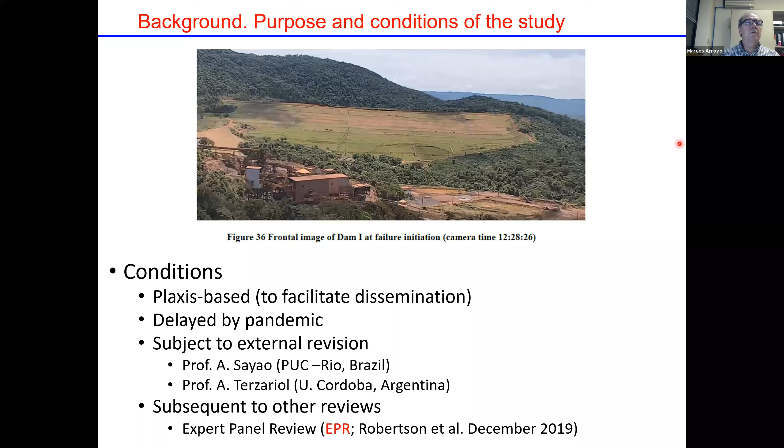I have to mention that shortly after we started, there was another review of this exact same problem that had come to light. That was the expert panel review led by Dr. Robertson, which was released in December 2019. That was of great help to us, because there was an enormous amount of work that was already done in that report.

But it is true that the report concluded there was one particular reason for the failure, which is a combination of strains due to creep and rainfall, that we quickly disagreed with. So, even if we disagreed with that conclusion, the report was useful, and that conclusion being there was also influential for the work we had to do.

I will first try to give you some background about the dam and its conditions, then I will have a section on material characterization of the tailings, and then I will briefly describe the simulations. There is also the report, as I said, that you can download. As I understand, the weather in Calgary is not ideal for outdoor activities right now, so if you're very curious, you can spend part of your winter nights reading the report.

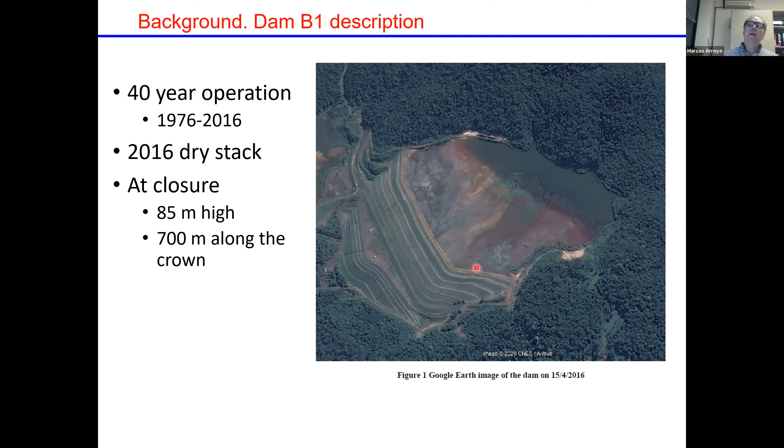If you look at the profile of one section, more or less you work out that the average slope is almost 1 to 3, and it had been even steeper initially. Then at some time, I think mid-90s, they decided to pull it back, and the continuation, the subsequent stages, had a lower slope.

One important thing about this dam is that the older stages had very, very poor drainage. So practically there was no efficient drainage in this area below the setback, because of either how it was conceived or how it was built, or problems with sinter feed as a material for drains.

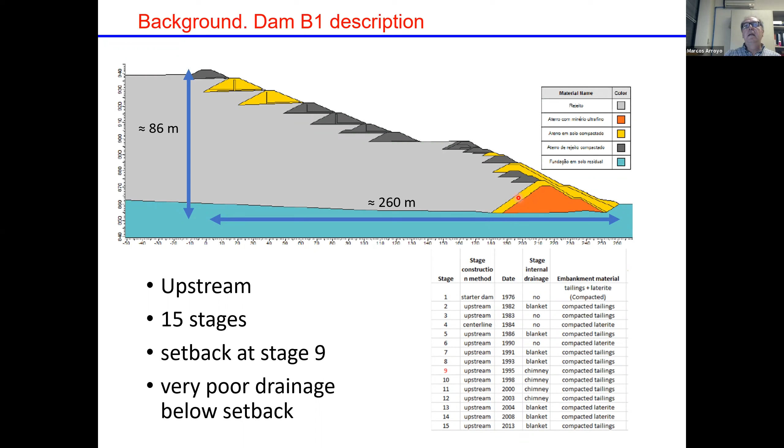After 2006, a spray bar method was introduced, but at that time the dam was already almost finished, 80 meters high.

That is a closer view of the timeline of how the dam was raised up. I have to say that Vale, which was the owner when the failure happened, took over this dam about 2001, this dam and the whole mine. And at that time, the dam was already a pretty steep one and a pretty tall one.

I have also marked here the timings of the CPT campaigns. Why? Because probably, without CPT, no one would have realized that the material in the dam was potentially liquefiable. The first campaign, in 2005, was relatively limited in scope, but already gave some indications on that respect. I don't know if it is related, but the rise sort of stops.

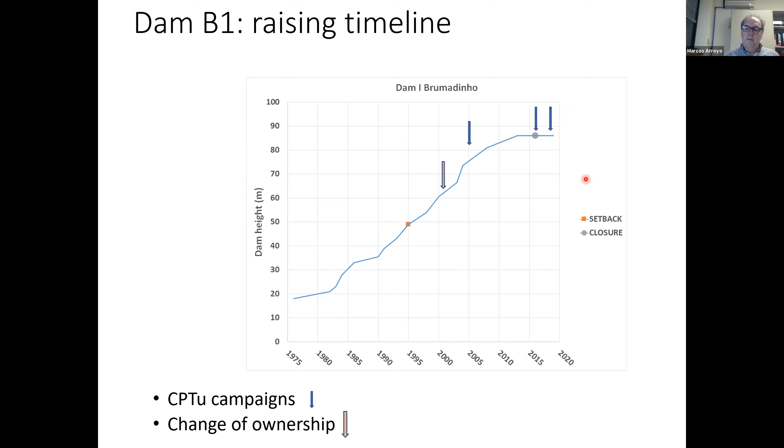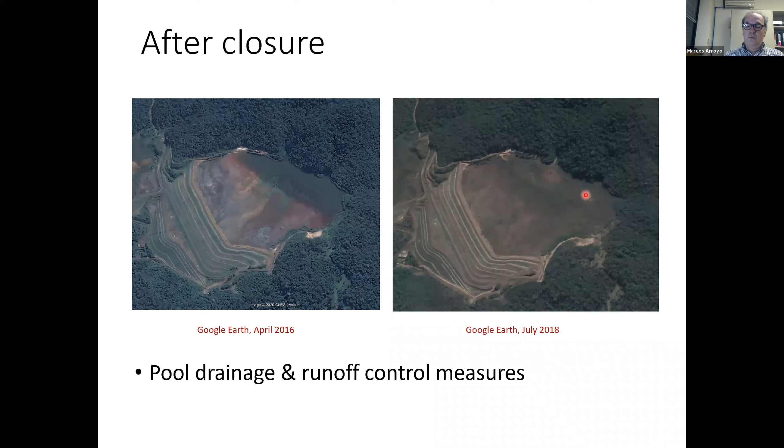After the dam was closed in 2016, the activities that took place were essentially directed to draining the pool and improving the runoff control measures on the side of the dam. They were seemingly achieving their purpose, because, as you will see, there were many piezometers.

There was a significant amount of instrumentation on dam B1. I think the total number is close to 100, but it's true that many of those 100 piezometers that had been historically placed were not all working. And of those that were working, some had erratic readings, etc. But still, there are around 25 piezometers that have a consistent history of readings between closure and failure.

When you look at what that story tells you, the water control operations that were taking place were seemingly effective, particularly above the setback, and not so much below the setback. But the situation was one in which water levels inside the dam were slowly reducing, which is one of the things that, when this explanation came out, made us perplexed, because we were aware of that already.

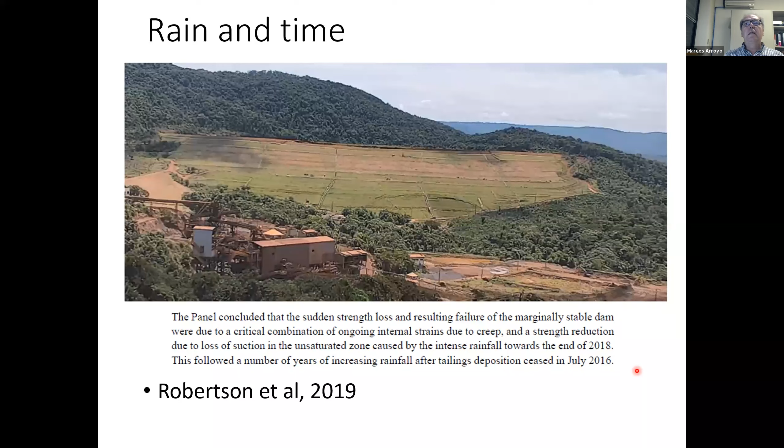Then this thing, how come? And there was this particular statement here: this followed a number of years of increasing rainfall after closure. Actually, we didn't find that. There were several gauges measuring rainfall close to the dam.

There was one actually at the offices of the dam, or very nearby, and this is the one we are using because it had records going back to 1975. It's true that the resolution of this gauge was smaller than the daily and hourly resolution of the other gauges, but those had a shorter time history. If you look at this record from 1975, when the dam was started, what you see is that the two years after closure were among the driest on the record.

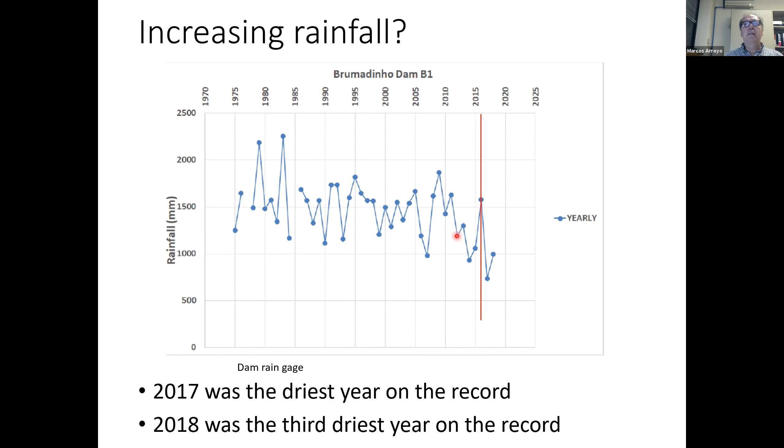The point is that everybody agreed that those results were suboptimal and that something should be done to improve the condition of the dam. Now the question was what? There was also an intention midterm to remine the dam, for reasons that will become clear in a minute. And a very highly qualified review panel endorsed measures six months before failure to improve drainage and to perform more site investigation and locate more instrumentation, because everybody was aware that any remining operation was going to be tricky.

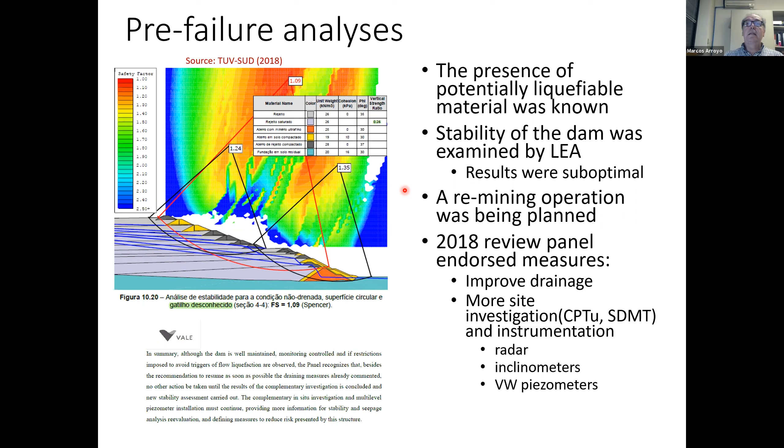So this is what was attempted in the last year. And of these ideas of improving drainage, the first idea was to try to perforate frontal drains at the setback, in the lower area of the dam - deep horizontal drains up to 100 meters long that were meant to be perforated, as we know, in liquefiable silts.

This is liquefiable silts which in a larger part were full of water. This is a very difficult task to perform, and the installation of those drains was not successful. There were 30 planned, and only 14 were installed. The average length of those installed was half that initially planned, and essentially, measuring the flow of those 14, they did only a fraction of what they were intended to do.

Moreover, the reason why this operation stopped is related to a particular drain, the one here in red, the DHP-15. DHP-15 almost could have failed the dam - it was a big scare, because during the installation those drains were perforated with the aid of pressure, and localized outflows started to take place at some of the drainage vents close to the drain. There was a transient piezometric jump, and they weren't aware of this, of course, when they were doing the drain.

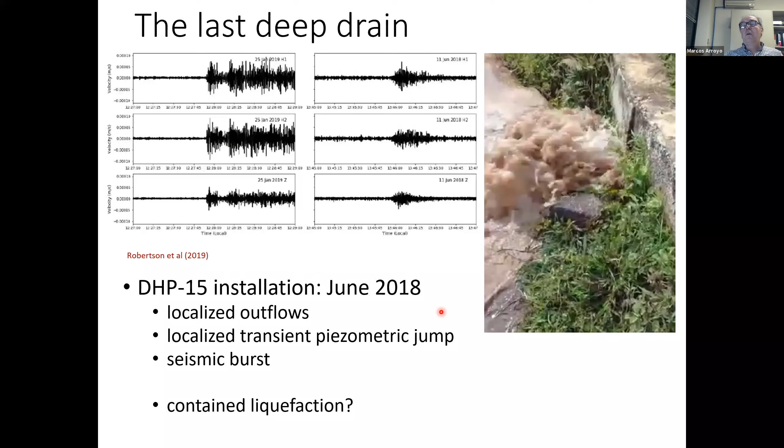Contained, because of course the operation was stopped. The outlet of that drain was sandbagged, and after maybe a week all the fluxes stopped. The piezometers went back to normal, and life went back to normal. That was in June 2018.

What happened then later? What happened after that? The only thing that happened was that the site investigation and extra instrumentation campaign that had been planned to find more about the dam's state and conditions was taking place.

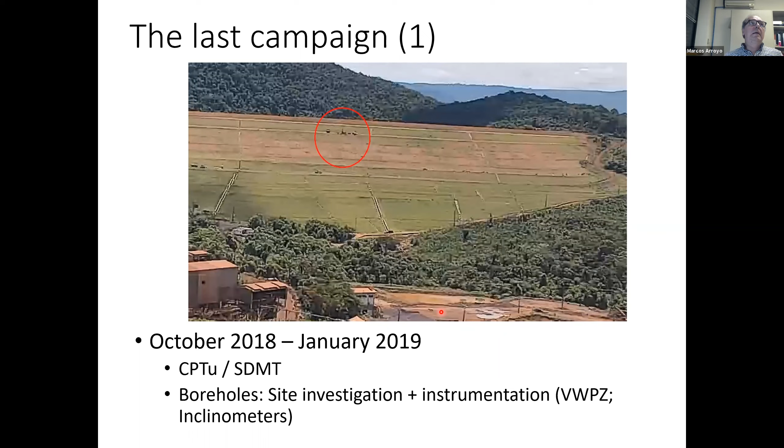The boreholes of these last site investigation campaigns were being done using wireline drilling and water circulation. Those drills didn't have automated registration of parameters of perforation or anything like that. The control of the pumping pressure of this water flow was done manually - there was this kind of activation in the machine.

Interestingly, the last two boreholes that were perforated were the deepest ever drilled in the dam - very deep boreholes at 76 meters. This is why they were using wireline, because those are substantial boreholes, in this particular case, to install piezometers.

The dam was, of course, being observed by satellites, though as far as I'm aware that wasn't being used during operation of the dam. But after failure, all those acquisitions by different satellites have been looked into very intently, and I am sure they will keep being looked at very intently.

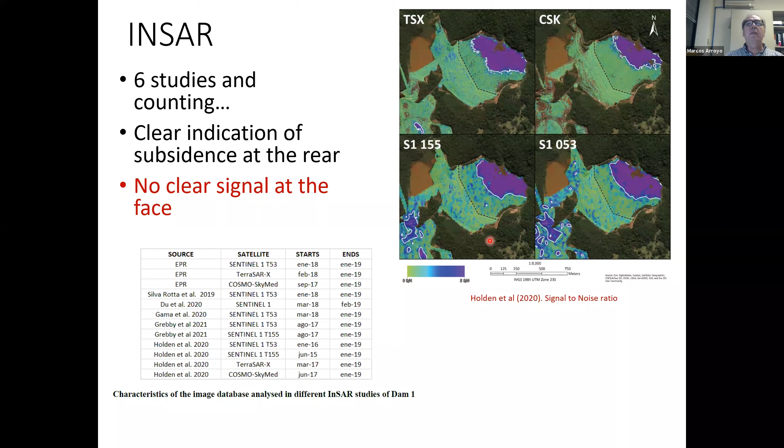This is an image from the Holden study plotting the signal to noise ratio. When you're blue, your signal is like 4 or 5 times that of noise. When you're green, the signal is just too noisy to trust. You see that most areas in the dam are just too noisy, whatever satellite you consider.

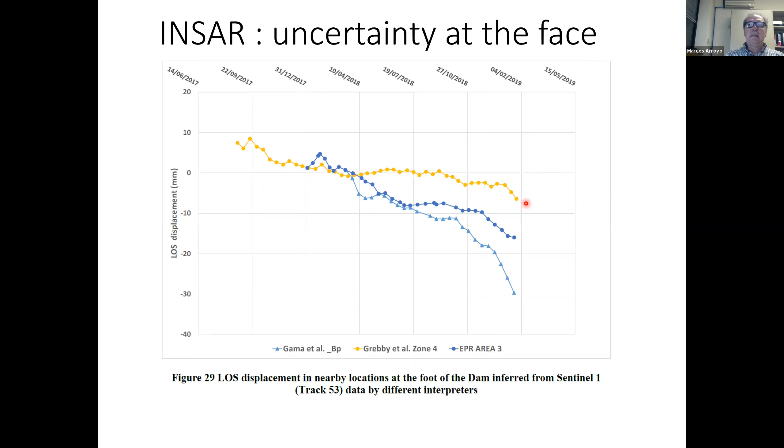There are some spots here and there, but it's difficult to figure out anything from those. Here I'm comparing 3 different studies using the same data, Sentinel-1, Track 53, plotting different areas closely located at the foot of the dam. Their interpretations offer a lot of different possibilities, so I think it's just too uncertain what the satellites tell you about what might have been going on.

Where the signal is clear at the rear of the dam, what you see essentially is consolidation of the softer tailings or slimes that were still settling after the dam had been closed 2 years and something before.

One interesting thing about these areas with clearer signal is that even in dry years or wet years, the weather in Brumadinho is very seasonal, with rainy and dry seasons alternating. You see 3 rainy seasons with no significant effect on this trace, and that is a repeated fact when you look at this data.

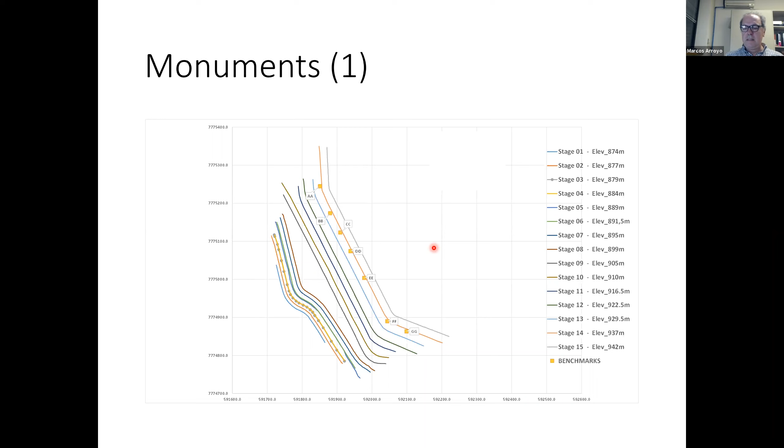Apart from InSAR, there was some topographic data. There were monuments located not in the last bench but the one before it. Those monuments had the typical history of monuments where the reference base is changed a couple of times, so the raw data is very noisy. But if you skip those obvious jumps, you're left with something that still seems jumpy.

This is settlement, a small settlement, but it bears some relation with what we know, because this is the period in which the deep horizontal drains were being installed.

Our interpretation of what happened is that initially those drains were installed in a way with a bit of issue, and there are records of discussions that also indicate this might be the case. They were initially installed without enough pressure, so there was a little material lost through drain installation, a volume loss inducing some small, very small settlement.

Then they started to raise the installation pressure, and at some point they actually reversed the settlement of the crown, essentially pumping the dam a bit. That went out of hand with the incident I described before, followed by sudden settlement from the contained liquefaction incident, then the last 6 months in which essentially nothing happened. After 6 months of nothing happening, failure occurred.

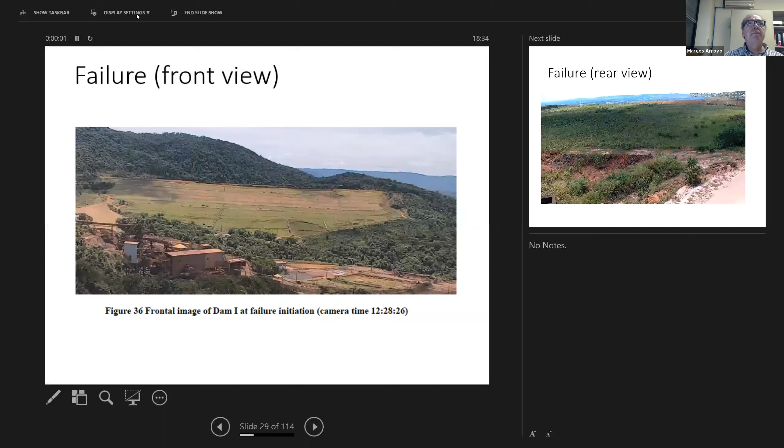There was, of course, a lot of site investigation data from the history of the dam. But the historic data was mostly from relatively shallow samples. And the main problem was that it had been unsystematic. You had a number of tests of different quality, but for instance, regarding the critical state line...

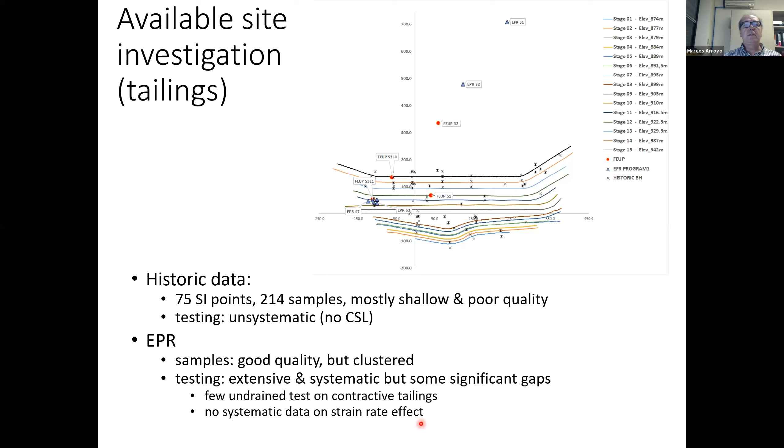If failure was really about creep, we would not be able to assess that with the information already available. So because of that reason and others we discovered later, we decided to recover some samples from the dam ourselves, with the help mainly of Professor Antonio Viana, whom you see here.

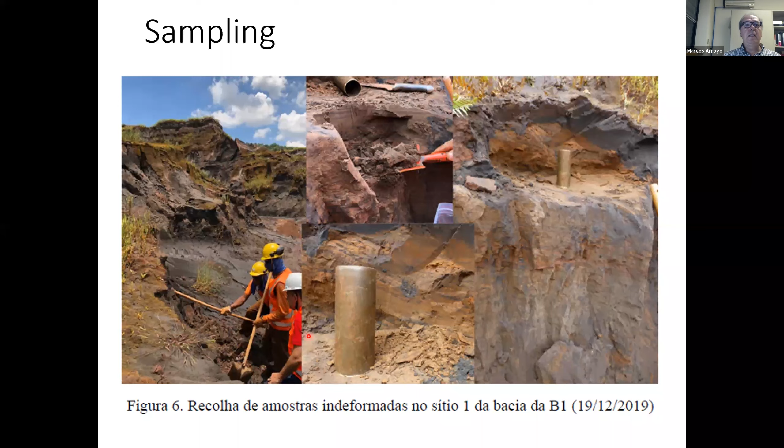That sampling was done with the help of the Federal Police, who are brave people — they weren't scared to go deep into the ravines of the leftovers. So you see in this projection, everything being sampled of the tailings, but you see how the red dots are relatively deep in the section of the dam.

So presumably the tailings might have been more similar to those involved in the failure than those sampled before — for instance, by the expert review panel, who had remained in this area, relatively higher in the dam.

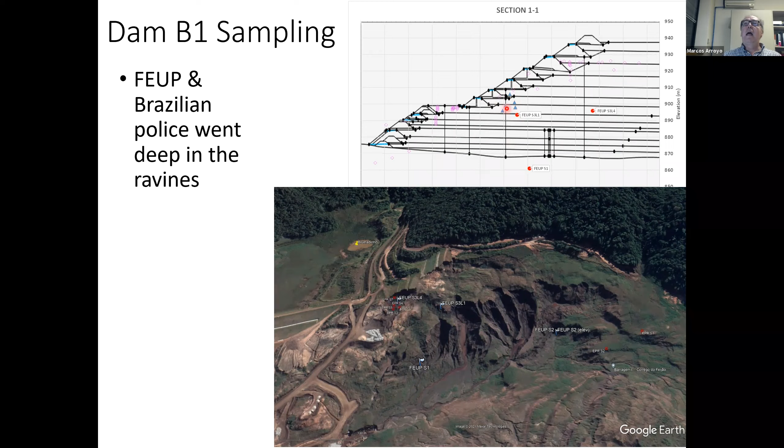Then when you look at this data — what are the tailings of Brumadinho? Well, they are like many other tailings: sandy silts and silty sands. And this is the historical data.

And you see there were more of the sandy silts, perhaps because, as I said, most of the samples were relatively superficial and close to the wall.

The expert panel had taken some samples at the rear of the dam to investigate the slimes. The slimes are plastic and have at least 20% clay material, two traits you don't see in any of the tailing samples - those coarse samples as identified by the EPR. Those are the fine samples, and those are the grain size distributions of the ones we took. You see, somewhere in the middle.

When we had intact samples of Brumadinho tailings - but when you look at Brumadinho tailings intact samples, what do you see? You see these very thin interlayers of interstratified materials. See a bit of red and a bit of brown, and here a lot of black.

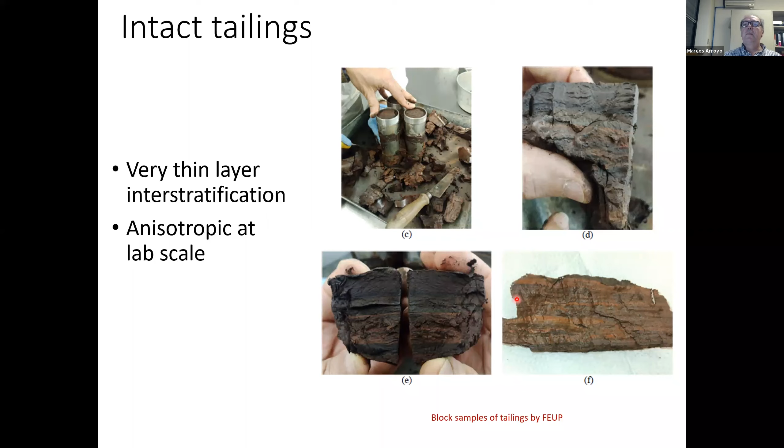The criteria used in Porto was based on color - you see, the black, the red, the brown. That might have seemed a trivial criteria. You see, well, they seem to be more closely grouped than the previous one.

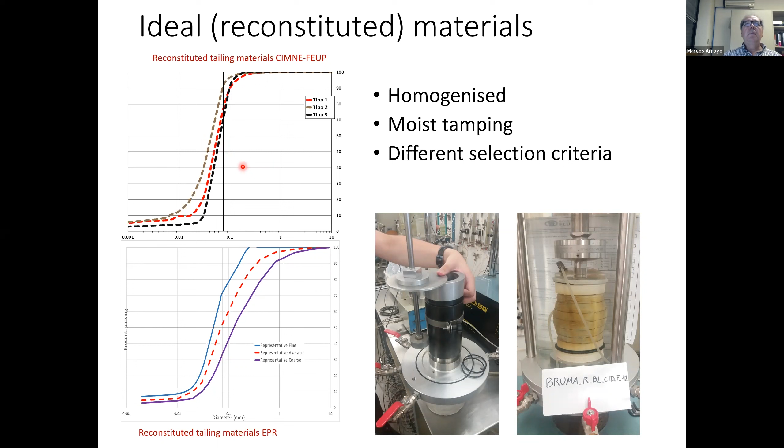And after you had created a sufficient amount of that homogenized material, you create samples by moist tamping, and then you do triaxial testing. But I was pointing out that here you might think, oh well, they are really too close if you look at their D50. But as it happens, D50 is not the end of the story.

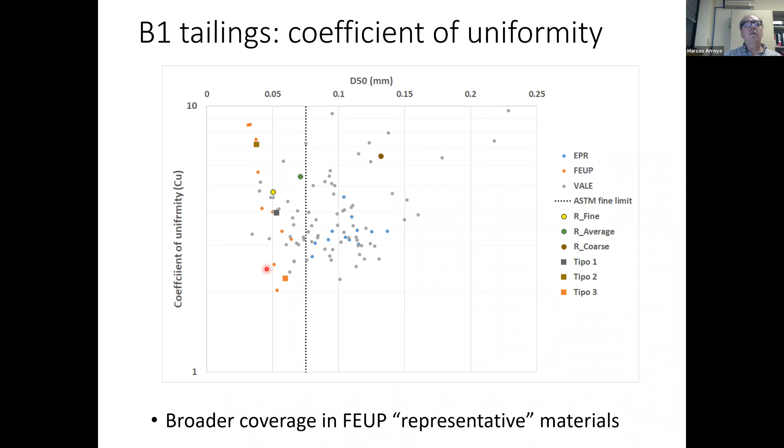Whereas here, if you look at these chosen by D50, they more or less lie at the same average value. The same happened when you looked at the coefficient of uniformity. Somehow the materials in Porto cover the whole span, whereas here, yes, they cover a larger range of D50, but I think coefficient of uniformity is a more important trait. Well, tailings at Brumadinho are very brittle, as you know.

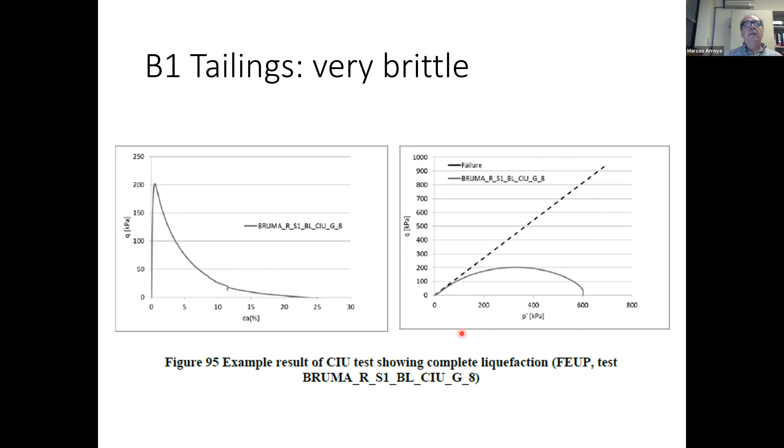This is one example, and there are many. You do a triaxial test, isotropically compressed, then shear - you see it goes to zero. And you cannot have more brittle than this.

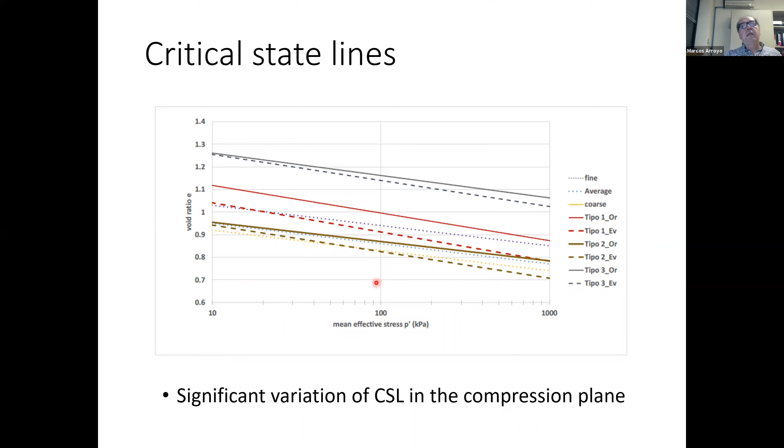And the thing to me is that this particular parameter doesn't change very much. This is not the case for the other projection of the critical state line, where those are just results for the different Brumadinho materials. You see how the critical state line - the slope, maybe not so much, but the position of this critical state line in the compression plane - varies significantly.

When you look at what might explain those changes, well, it is not really D50. D50 doesn't correlate with the slope or the intercept of that critical state line in the compression plane. There are other things - the slope doesn't vary very much, but things like the coefficient of uniformity or specific surface correlate better.

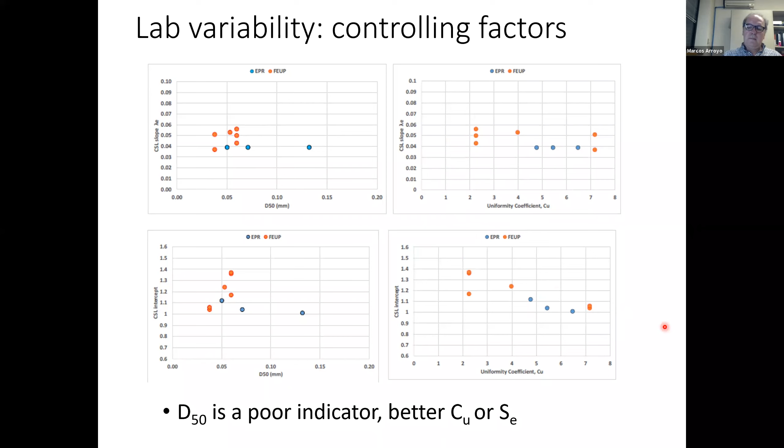Then those tests were failed in the laboratory, and one of the important things you want to figure out from those tests is what is peak undrained strength. One limitation that we realized relatively late, but it was important, in the campaign performed by the expert panel report, was that they had relatively few tests in which undrained shear was taking place on the contractive side of the critical state line, that is, for positive state parameters.

Because they had few, they traced this envelope that was also sustained by dilatant data up here. Here you see those are anisotropically consolidated, and those are isotropically consolidated, but you have something that joins them.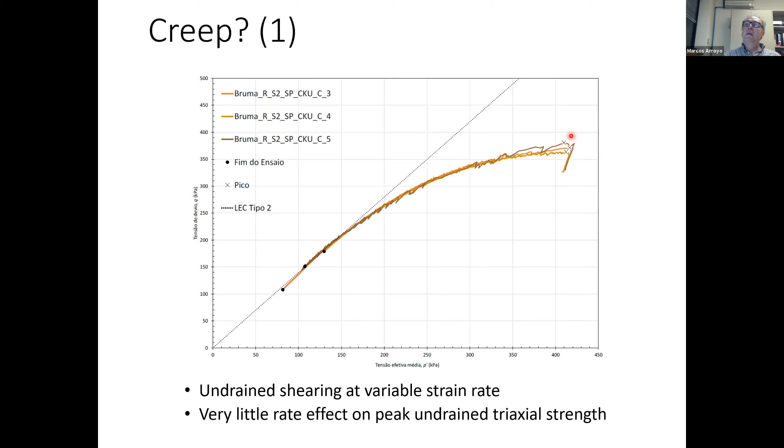What about creep? There was a systematic effort at Porto to figure out if varying the strain rate would change anything, for instance the peak strength. You see very little change. Here we're changing the strain rate of shearing by two orders of magnitude, and even though things go up and down for different materials plotted together, the upper boundary is a 2% increase of normalized undrained strength per order of magnitude change in rate of shearing. As a reference, moderate plastic clays show about 10%. So we concluded that Brumadinho tailings are not viscous and will creep very little.

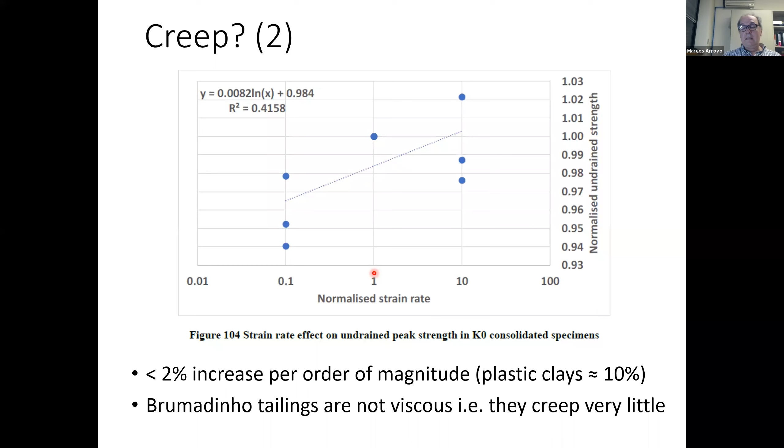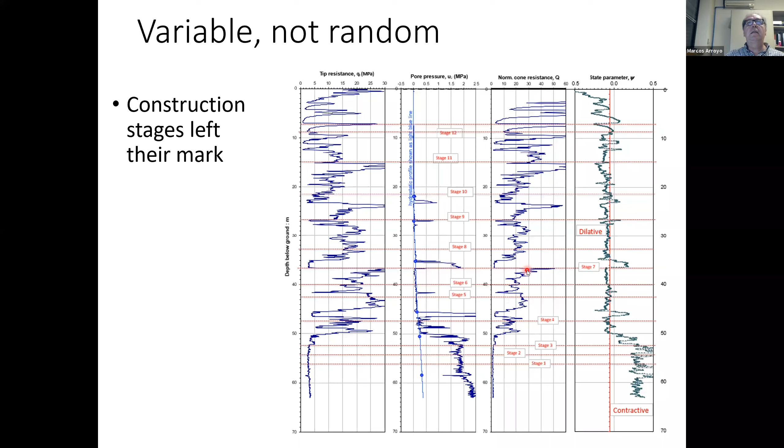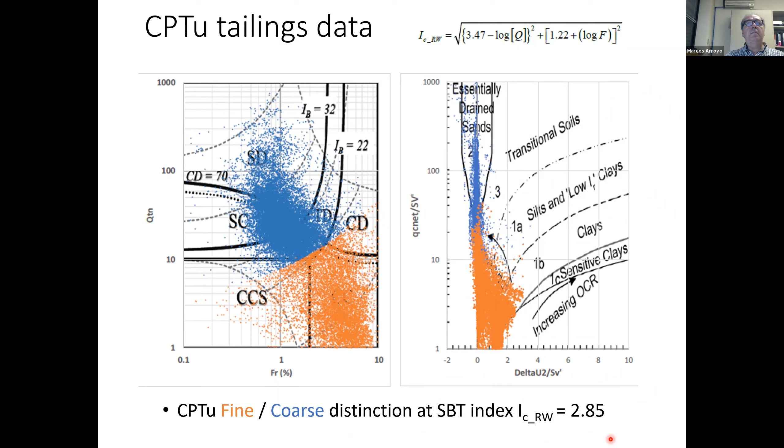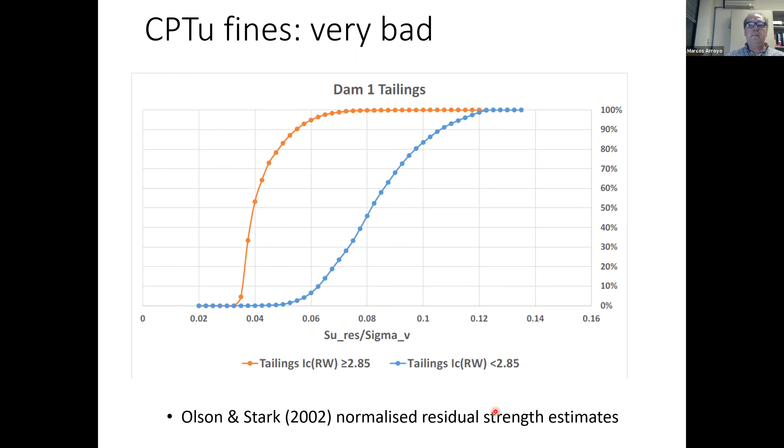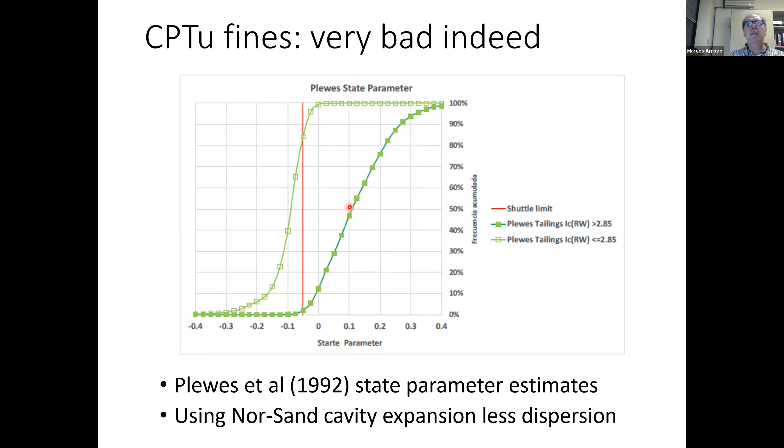If you attended last lecture by Mike Jefferies, he explained very clearly that the characteristic value is about 80%, which is uncomfortably close to liquefied here to the left. So even the coarse material was in a situation far from ideal. But of course the CPT fines were catastrophic, averaging 0.1. Even if you don't believe these higher values, using Nor-Sand you'll get something with the same average but narrower, still terribly liquefiable.

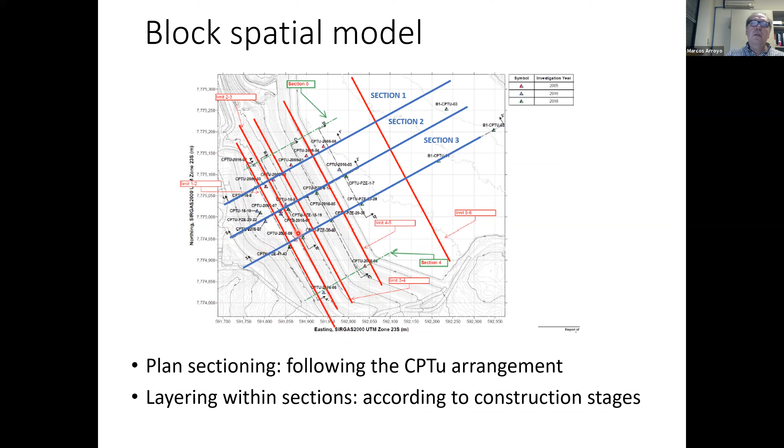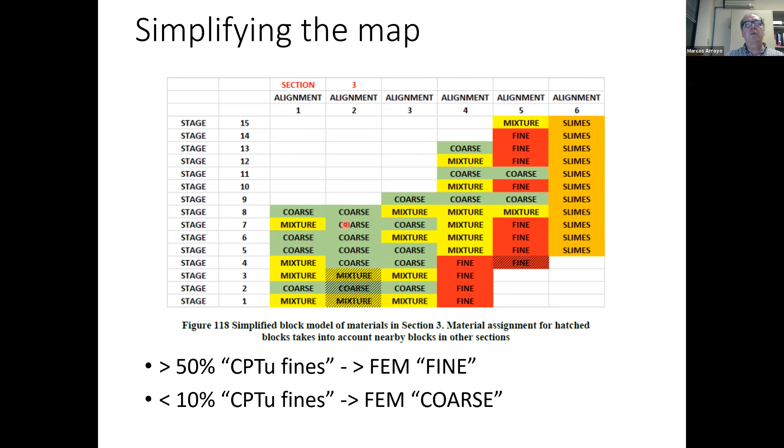Once you have that distribution of how many CPT fines you have in a particular area of a section, we had to simplify that, because Plaxis doesn't have the ability to do something more subtle, like random field analysis. But we didn't want more than 3 materials for the tailings, so we came up with this criteria: if you have more than 50% CPT fines, that block qualifies as fine; if less than 10%, it qualifies as coarse; and in between you have something.

I'll go now to the simulations, but I had one section on bonding that I feel I need to talk about, because on the expert panel review there has been much emphasis on the Brumadinho tailings being bonded, and we don't believe that. But the argument deserves attention, and it refers to something related to what was observed on the triaxial test, also scanning electron images, and also data from in situ test.

We did some scanning electron images as well, and yes, if you zoom a lot you will see there is some bonding between particles. But if you zoom out, what you see is a lot of unbonded contacts as well. So is the bonding you see here something you might have created when you dry the sample for this kind of inspection? How pervasive is that? What is the chemistry here? Those are things we don't know yet. But more importantly, what are the mechanical consequences of having particles that are maybe a collection of smaller things?

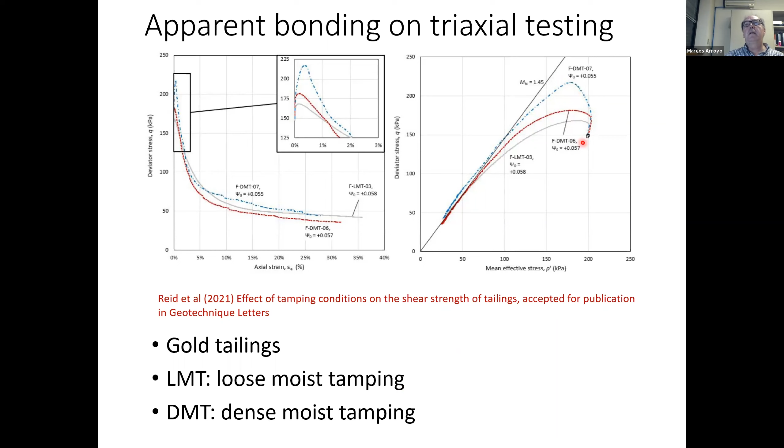When you look at the triaxial evidence, there might be other effects at play. The team at the University of Western Australia has been doing interesting testing, creating moist tamped specimens of gold tailings at the same initial state parameter by two different procedures. One is loose moist tamping, creating the specimen above the critical state line. The other is dense moist tamping, where the specimen is created below the critical state line and then compressed to a situation where it's loose. Those created denser appear to have a much larger peak, so you could compare and say there is some bonding there. But it's not really bonding -- it's this trajectory of having been created denser, at least on those samples.

That happened as well. This trajectory is also present in some of the specimens which the panel have seen with this increased brittleness that they identify as a result of bonding. So this is a relation I leave in doubt. I think dense moist tamping might also be at play in those observations. When you look at the CPT test, there is of course this graph by Professor Robertson, and I have plotted here the median values for all the tailings, coarse tailings, fine tailings.

There is a much more direct way to look at bonding when you have shear waves. That is based on very elementary observations that were published at the Canadian Geotechnical Journal. Here they are testing uncemented sand, then the same sand cemented, and seeing the effect of confining pressure on shear waves. Essentially, they are fitting the Hardin parameters alpha and beta. You see that when you have uncemented sand, confining pressure does have an effect, it increases your shear wave velocity. When you have cemented sand, the same sand that has been cemented in the resonant column, that effect of pressure disappears.

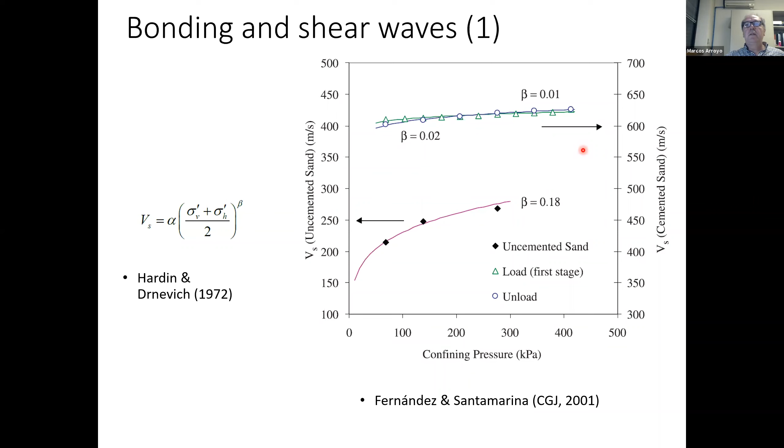These observations by Santamarina and co-workers, they have kept on doing similar observations in the last 2 decades. Now they have published these beautiful databases because they have observed that the 2 Hardin parameters are related. Alpha is related to beta. Typically you will have clays here with large beta and low alpha, then sands. And here at the lower end, you have cemented materials with very low betas and very high alphas.

We can compute Hardin parameters using the seismic dilatometer data that was available in Brumadinho. Those will be your Hardin parameters for that seismic dilatometer data. We can also compute Hardin parameters for Bender element results on reconstituted triaxial samples. This is for the panel study. This is for those studies in Porto.

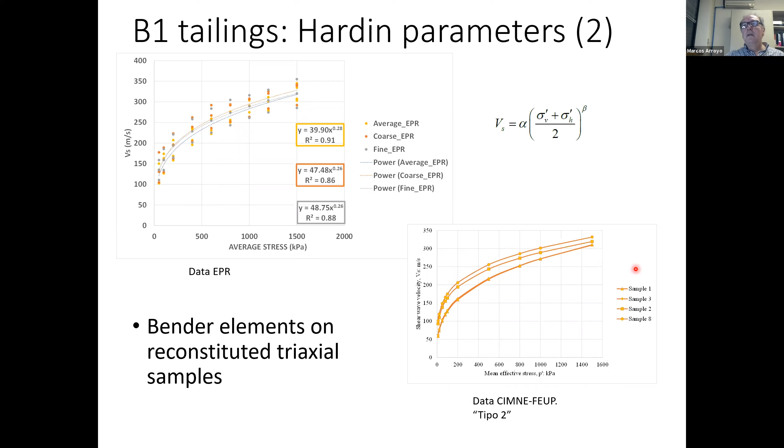When we do that and plot all the results of Brumadinho against the database, where do they lie? Do they lie next to the cemented materials? No, they lie here in between sands and clays, as you would expect from silts. So our conclusion was that those silts were not really cemented significantly.

Now I move to the last bit of my simulation, and I know I'm running late, but it will be relatively fast, because the first thing I have to talk about is that we had to use Plaxis, and we obviously wanted to use something embedding critical state ideas. When we started with this project, NorSand was not available in Plaxis. So we went for this model, the clay and sand model proposed by Yu about 20 years ago. It's a model that we had experience with in other liquefaction problems, and that we had programmed in other software, and had some advantages even in Plaxis.

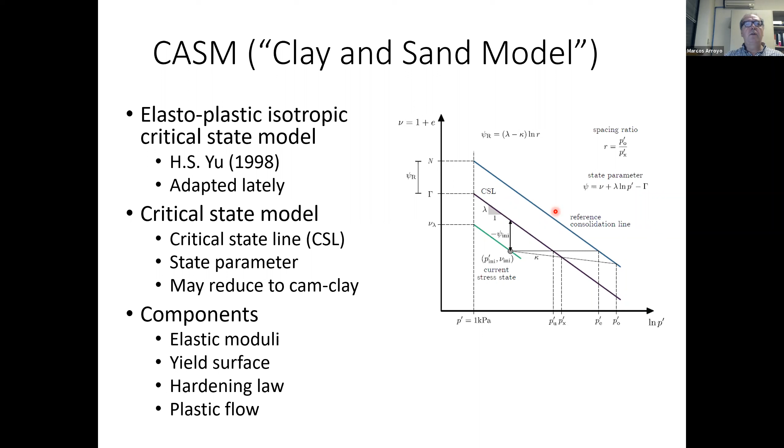This is a relatively simple elastoplastic isotropic critical state model. If you know Cam Clay, from Cam Clay to CASM, as we are using here in Brumadinho, there are very minor differences, but they are important. One of them is related to the plastic flow. The plastic flow we're using is non-associated, and that introduces a new parameter M, but that new parameter is interestingly very easily related to K naught.

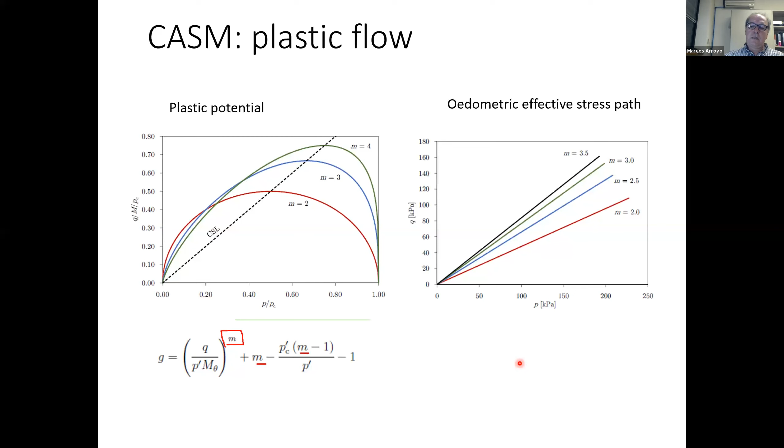And then there is your yield surface, in which 2 parameters N and R appear that are not in Cam Clay. In Cam Clay, you will only have M. R and N, between the 2 of them, they really endow the model with the ability to have brittleness, because they control where the critical state intersects the yield surface, which is no longer at the top as in Cam Clay, and how steep is the fall to critical state from the top of your surface. So those are 2 key parameters. Still in total there are 7 parameters, and this is one advantage of CASM.

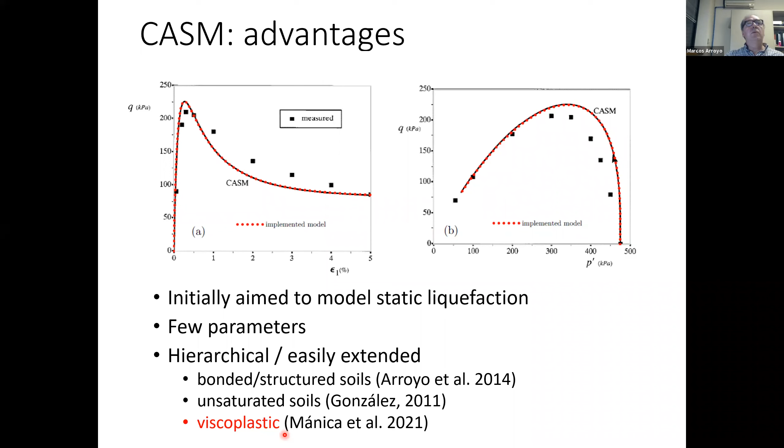The other advantage is that it was originally formulated precisely to model static liquefaction. And then it had the advantage that it can be easily extended. We needed a model that could be extended to a viscoplastic case, because we wanted to look at what creep will do to this case. For that reason, there was a development of CASM, called CASM Visco, created specifically for this problem.

When you add viscosity, a viscoplastic element to CASM, what happens? Well, what happens is that you still liquefy, but you see the peak strength, the peak undrained strength in your path towards a critical state will depend on the rate of loading. If you load very slowly, you will reach a lower peak strength than if you load very quickly.

Well, CASM is no panacea. CASM has important limitations. It's not good for cyclic loading, but in this particular case, it's important to realize that because it's an isotropic model, it cannot account for induced anisotropy during consolidation. So it is essential when using a model with this limitation to rely on what you think is more relevant of these two stress paths for the situation at hand.

We thought that the more relevant path was the K-naught consolidation, so we were using this kind of simulation to match our test.

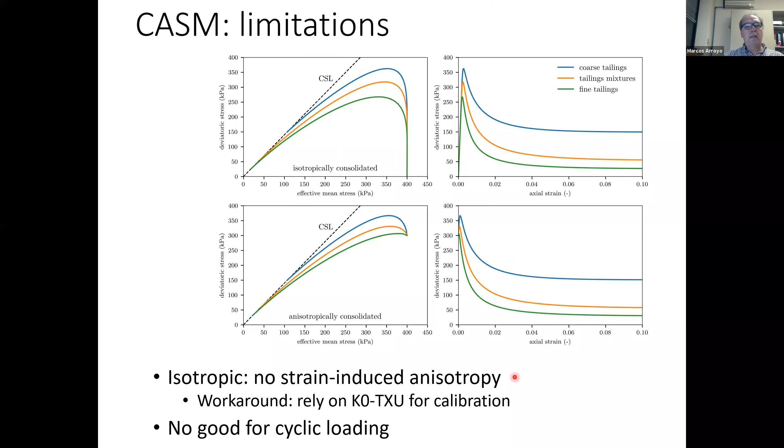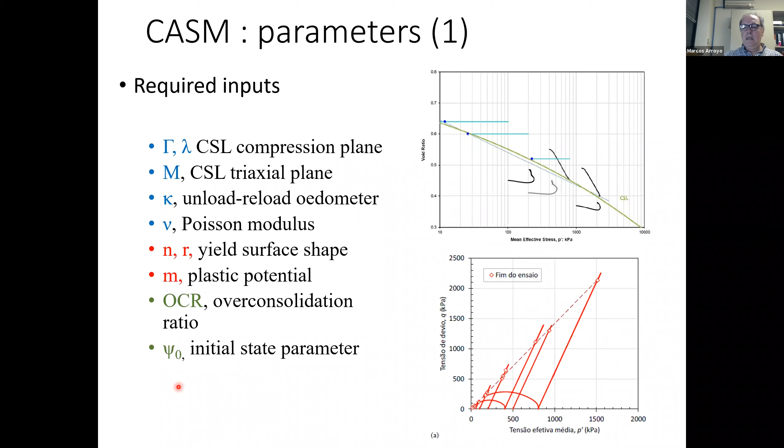The CASM requires some inputs like any other model. Those are critical state parameters, elastic parameters, those that I mentioned before, and then overconsolidation ratio and initial state. We have recently worked out, and it's been published by ICE recently, that for normally consolidated tailings or materials such as this, these more complicated parameters can be advantageously substituted by things that you can figure out from, say, in situ testing. But you will also need the initial state parameter.

OCR by definition in this case is 1, so it can be made relatively simple. Still, you need something from the lab, so we need laboratory test results, and we need to link them. You cannot do everything with in situ tests yet. So how to link the laboratory test results, the different materials, with our

mapping of the dam based on CPTU. The link has been for us permeability, because we could compute for every single grain size distribution a Kozeny-Carman estimate of permeability, and then calibrate that against some permeability measurements in the lab.

And permeability can also be linked, if you are able to simulate a CPTU, with the value of BQ. We said before that everything above BQ 0.01 is going to be our fines. So by these simulations, we are able to tell that those fines should have permeabilities of about this value. Those fines in the field, the CPTU fines, should have permeabilities around these values, so that should be more similar, say, to the brown Porto material than to this yellow material, the fines from the panel.

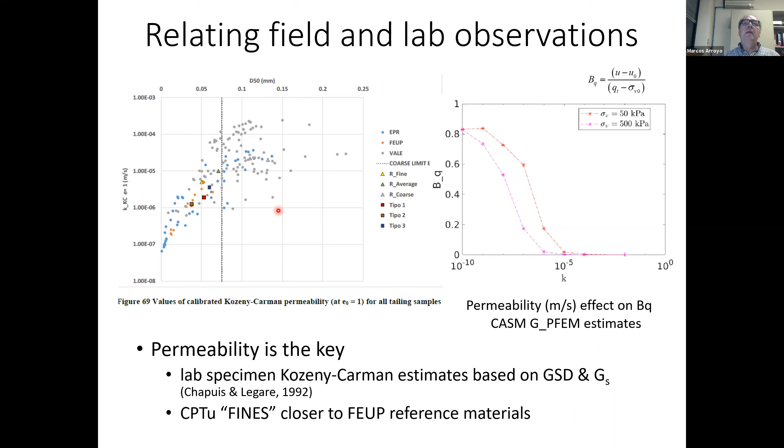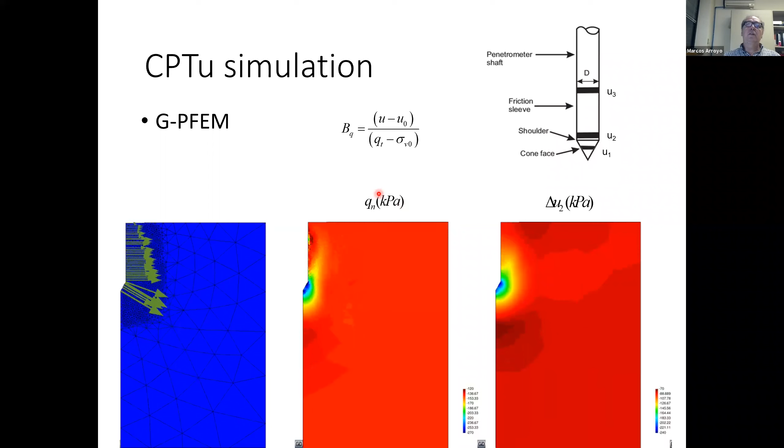I should mention how we obtain that BQ versus permeability relationship, because there are new technologies that let you simulate CPTUs with reasonable constitutive models such as CASM. So you can compute your BQ, because that will be the ratio of these numbers that you're computing here and the numbers you're computing in this thing. Well, this is not QN, this is sigma vertical, but you see the point.

Anyway, ready to move to the simulations. The reference models that we have used are plane strain models. Why are we using plane strain? To begin with, for practical reasons - you cannot move to 3D to start. And second, if you look at this failure, at least these three sections are in here, which looks to me, as a first approximation, reasonably bidimensional.

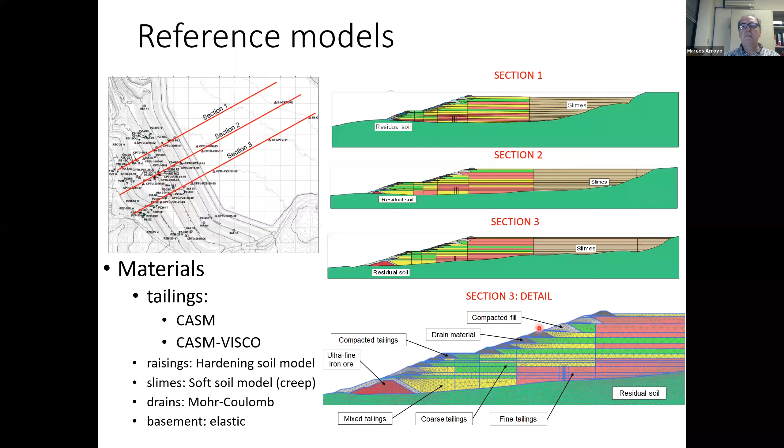So at section 3, there was the drilling, and I will pay particular attention to the situation in section 3. You see the different reference models have different tailing material distributions according to that CPTU simplification we mentioned. There are other materials too, of course: the residual soil, the compacted fills, and the drain material was also included for chimney drains and blanket drains when they were present.

Of course, apart from calibrating CASM, you needed flow properties, because the simulations - that is one good thing about Plaxis as it is now - you can run proper coupled hydromechanical models. Also models in which the unsaturated part can be included automatically. You don't need to move from a flow model to a mechanical model; you can do it all together, which I think is advantageous.

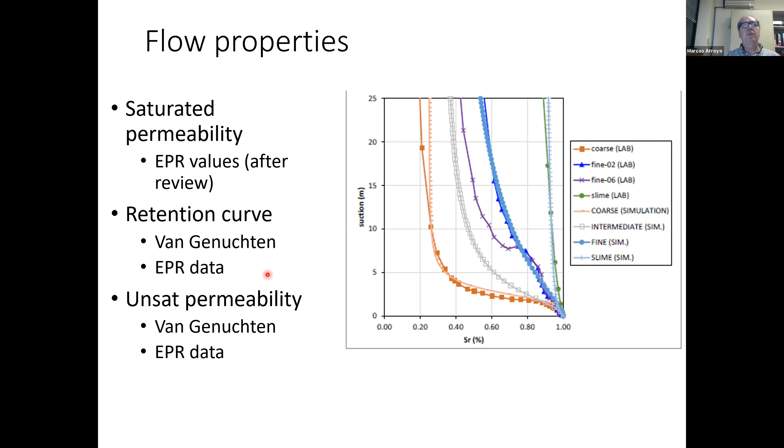So for instance, the retention curves were modeled based on excellent experimental work done by the EPR panel. In general, the EPR modeling of flow, which was separate from the mechanical model, was top-notch. We did examine permeability in much detail, but we ended up taking the same values that they had used.

So you have this thing where you start building your dam, because you're using an elastoplastic model that is history dependent, and you will locate things initially with a particular state parameter, and that will change as you're building up the dam. So there are a number of stages in which consolidation is taking place, because those are coupled phases. We knew how long it took more or less for each one to be raised. So, sorry, let me see if I can move further.

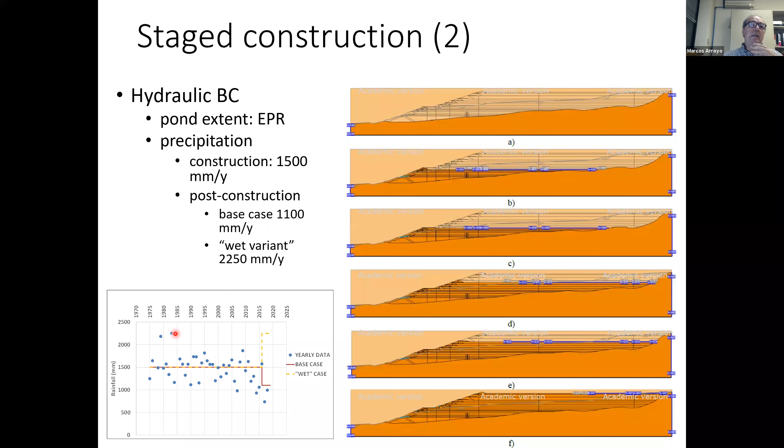One particular interesting aspect is the hydraulic boundary condition. The pond extent, and the history of pond extents, we took from what the review panel had found. That was excellent work. We didn't agree with the rain they used, but we did use different conditions. The base case had the last 3 years drier, those are the data points I showed you before. But we also explored a very wet case, a what-if case: what would have happened to our model if the last 3 years had rained as much as the rainiest year, which was 30 years ago?

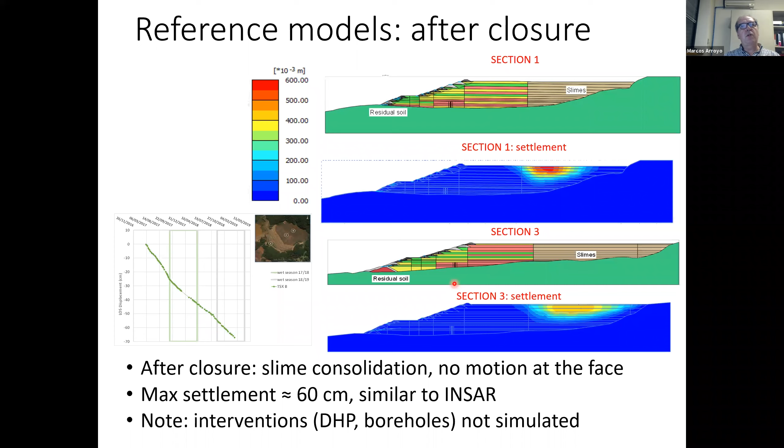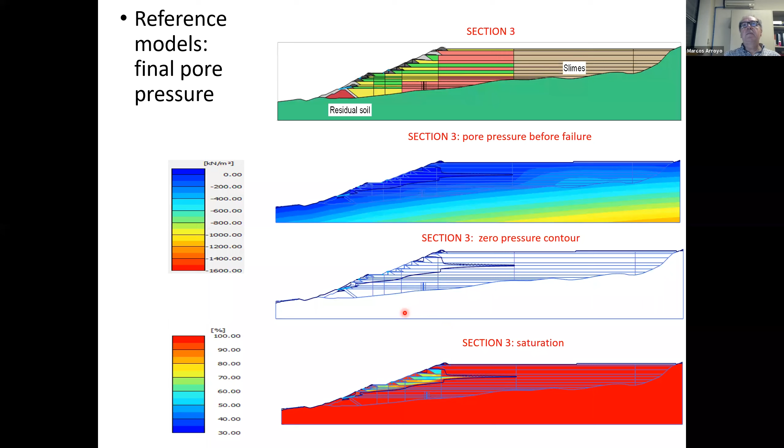This reference model with low rain in the last 3 years was verified against data from the water level indicators, the CPTU, the piezometers that were available, and more or less the results fit. Very similar results to the flow model in the preceding expert panel, which isn't surprising because key properties are the same in both simulations. Only here we have consolidation.

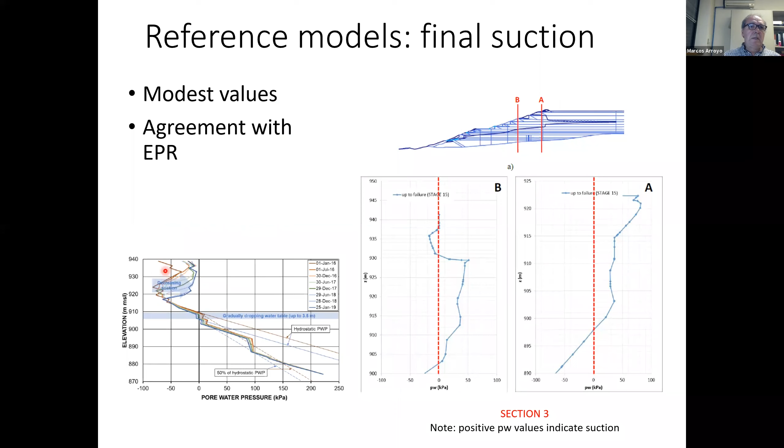What about suction? Well, you have some suction in the unsaturated parts, not very much, not very much. And the top value, about 50 kPa, is similar to what they got.

Then, what if it had rained a lot in the last 3 years after closure? If it had rained a lot, the dam would have saturated. But remember, we're running coupled models, so we can look at the displacements created by that super-saturation of the last 3 years. And well, there is no failure. This converges, and you have a bit of settlement, yes, and a motion in the area that was mostly unsaturated before, but there is no failure, no instability. Some motions because it would have saturated fully.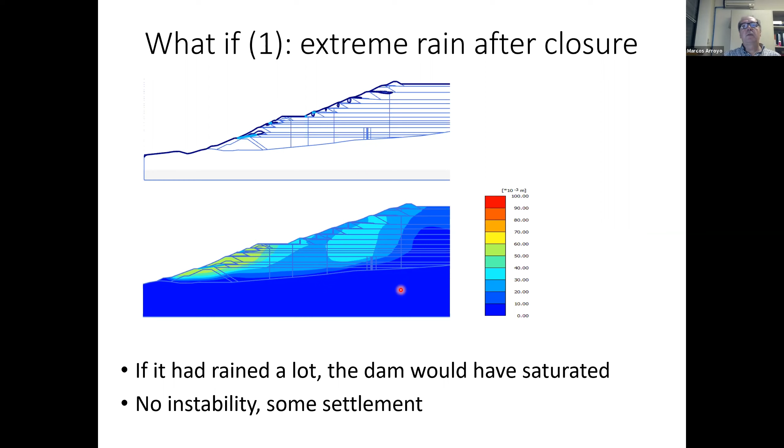What if the dam had been made with a material that crept, that had some creep? What if we simulate with CASM-visco instead of CASM? Essentially what happens is that we delay consolidation where it takes place in the slimes. Nothing really interesting happens at the face when you add creep, whether calibrated creep effects or extreme creep effects. What is extreme creep? This is our laboratory results for strain rate. This is the calibrated creep, which is more or less like the laboratory results. And this is an extreme creep, like if you were a plastic clay with effects we didn't see in the laboratory.

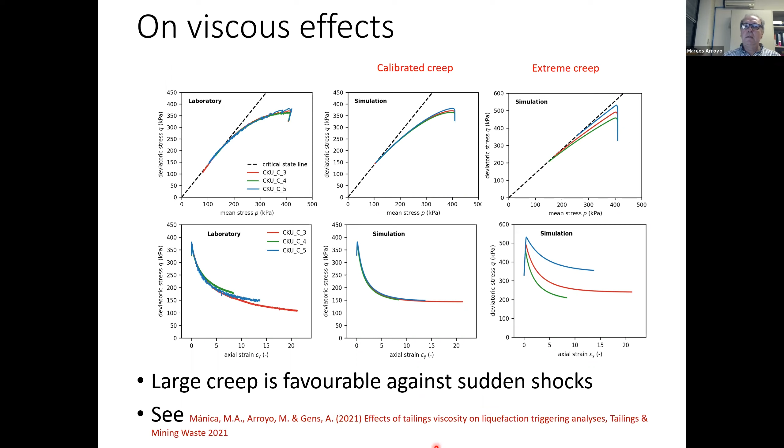Thinking about that, we've come later to the conclusion that if there had been large creep, maybe the dam would have still been there, because large creep is favorable when you have a sudden shock. That has been recently discussed at the Tailings and Mining Waste Conference that took place near your town.

Now we're coming to the last bit, which is triggering analysis. Triggering analysis is different from addressing susceptibility. When you address liquefaction, there's a step where you address susceptibility, usually through a CPTu study, about the condition of a deposit. If it's contractive and saturated, it's most susceptible to liquefaction. But that's not the same as triggering analysis. In triggering analysis, you try to identify whether a potentially liquefiable deposit liquefies after some loading event. You have to identify an event, a hydromechanical loading event.

And there are a variety of examples or possible triggers that have some kind of replicas in the laboratory.

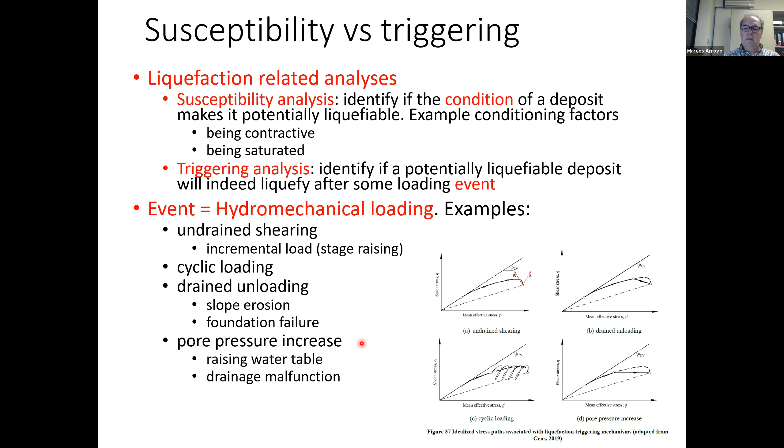Now we're coming here to the Brumadinho problem. The Brumadinho problem is that we couldn't find a trigger for a long time. There had been no incremental loads. There was an excellent seismological study proving that there were no earthquakes. There had been no significant blasting that day. There had been no obvious slope erosion or foundation failure.

Internal erosion, you see, for a while we were clinging to the hope that this single isolated photograph from one day of an inspection report would explain the failure. That was six months before failure, and it was never repeated, that kind of observation. I think it was related to the issue with the failed installation of the drain.

And as for pore pressure increase, general raising water level, no, it was going down. Drainage malfunction, it had been as it was from always.

And what about creep? Well, creep, you know, there are those experiments with triaxial testing, published in the Canadian Geotechnical Journal, on marine dredge sand, loose. You see the isotropic consolidation, then shearing. They come to point A, there is creep to B, then they come to C, more stress obliquity. They creep again, and in this creep path, boom, it fails to liquefaction.

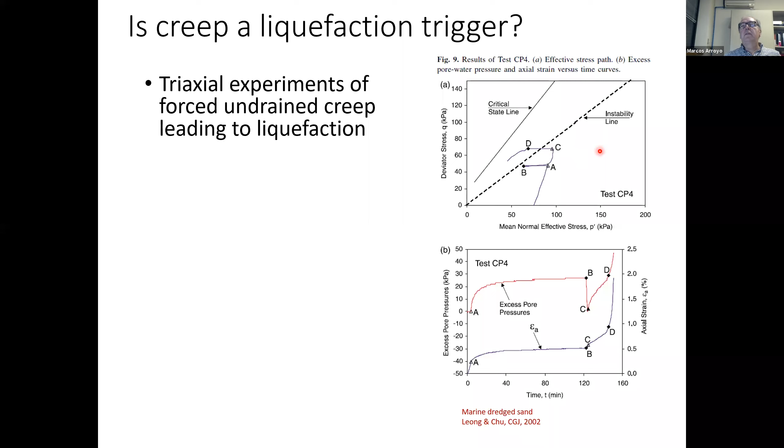So someone can say here creep has triggered liquefaction. And I will say no. What has triggered liquefaction there is that the drainage line was closed at point C. The ability of the soil to creep is like the fact that this instability line is here. That is a result of what is the initial state, of what are the other properties. The ability of a soil to creep is not a trigger, it's a conditioning factor. So we didn't believe in that as a trigger.

And finally, well, maybe the trigger was hidden in plain sight. There was another review that was only for Vale, more focused on organizational issues related to this failure. But there was a very interesting comment made in that review, which was in Portuguese. They said, well, it's true that the previous mechanical review had discarded this as a possible trigger, and it seems relatively small, but it's true that they were drilling there.

And when you look at where it is positioned, it is suspiciously centered where things start happening. And this is true, it's suspiciously centered when things start happening. The borehole that was drilled that day, I already said, was one of the deepest ever drilled in the dam.

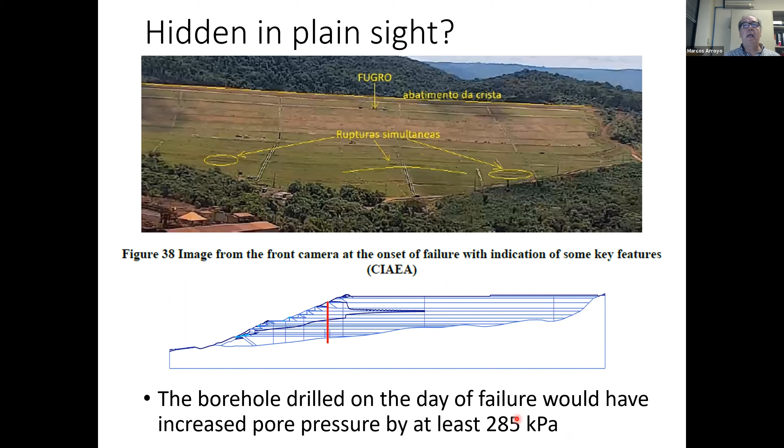And after simulating the flow, you see this is the zero pore pressure condition. If you're drilling a borehole here with water, you have increased pore pressure around the borehole, but all this stretch. And this is a very tall dam, close to 300 kPa. So that started to become suspicious.

So we performed an analysis using CASM, a conceptual analysis, trying to see if it was possible by borehole overpressure. You have an axisymmetric model, and here close to the wall, we're going to suddenly raise pore pressure. This is again a hydromechanically coupled model, and we see what happens.

And what happens is that liquefaction takes place around the borehole at distances of up to half a meter. Of course, it will depend on the relation between how fast is this rise and the permeability of the material. If the material is more impermeable, it will be more likely for something like this to happen.

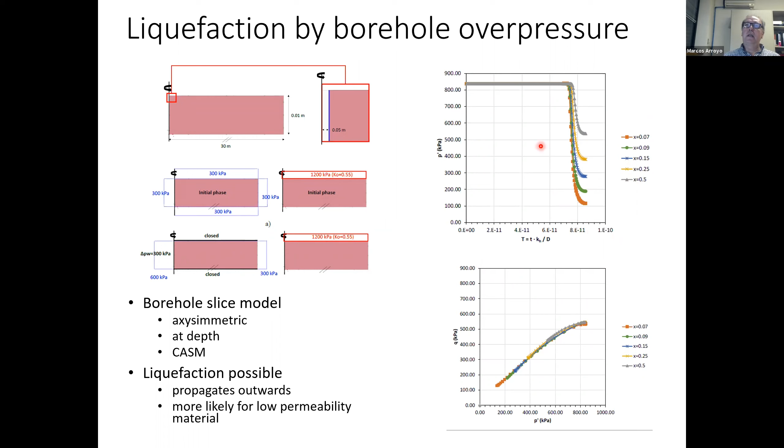Now, that last borehole, at the bottom, we have a CPT next to it. And at the bottom of the dam, there was one of the worst areas with a more concentrated amount of fine material present, CPT fine material. There had been a precedent borehole, almost the same increase in pore pressure, almost as deep, but that one had a condition that was not as bad as this one. You didn't have 12 meters of highly impermeable liquefiable material, you had some drainage layers there.

So anyway, we had at least one candidate, so let's try it. We're going now to see what happens to the model when we liquefy one of these tiny bits here, a cluster 1 meter by 3 meters around the borehole. We liquefy it in CASM by reducing parameters N and R.

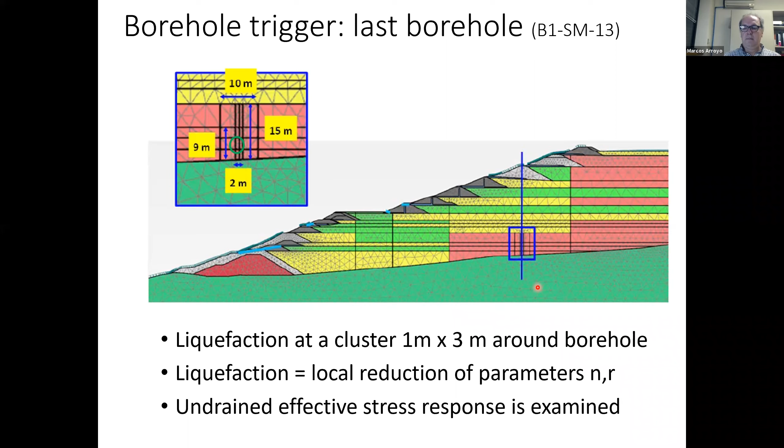And we're going to see what happens, because whatever happens, if it happens, it happens very quickly. You have seen the failure. So the model now is going to be undrained. So what happens? Let's see if this thing works, because typically it won't.

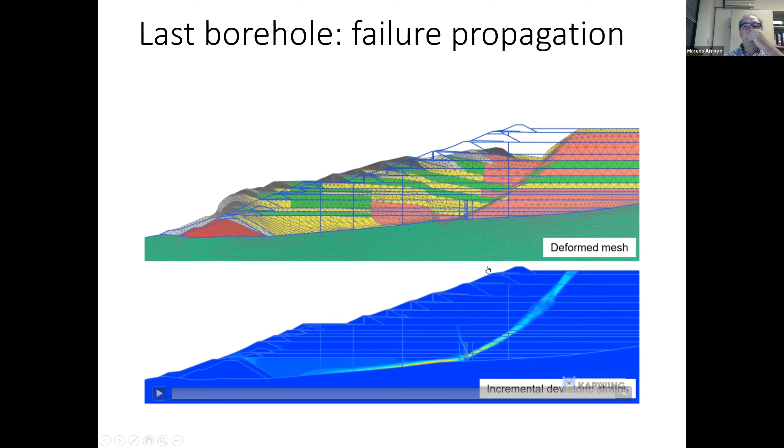But yeah, you see something starts happening there. Something propagates, and then falls down. The kind of failure you see here has some features very much like the ones we have seen in the videos: the front of the dam moves horizontally in advance, and you have a larger settlement here at the crest. So that is plausible.

And also, of course, we are doing 2D analysis. So that's not a borehole. The borehole is limited in the direction perpendicular to that 2D analysis. So we did something that's not a full 3D of the dam. We just simulated if the 3-dimensionality of this initial liquefaction trigger made an effect on that failure.

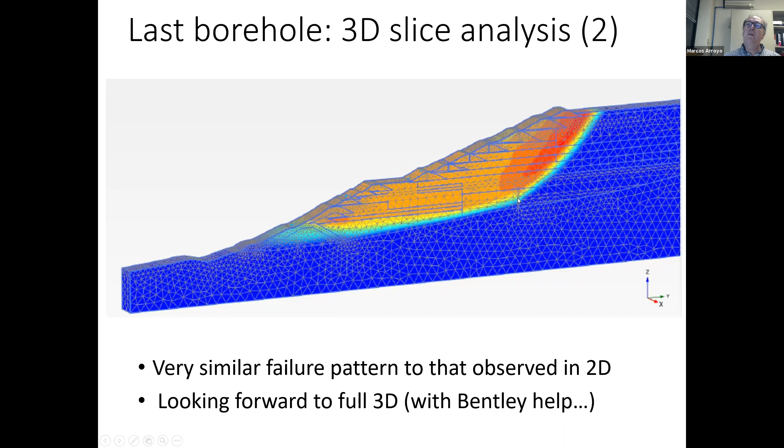In passing, let me just say that 3D Plaxis does not include effects such as rain and such like. So it is advantageous in some respect, but it would have been complicated to run the similar analysis using 3D Plaxis. Well, what happened is that yes, you had the same kind of failure in this 3D model, in which the only thing that starts liquefaction is this tiny bit here. You see the scale? It's sobering. We're looking forward to move that into a full 3D. That will be demanding computationally, because again, you see the size of what is triggering the failure.

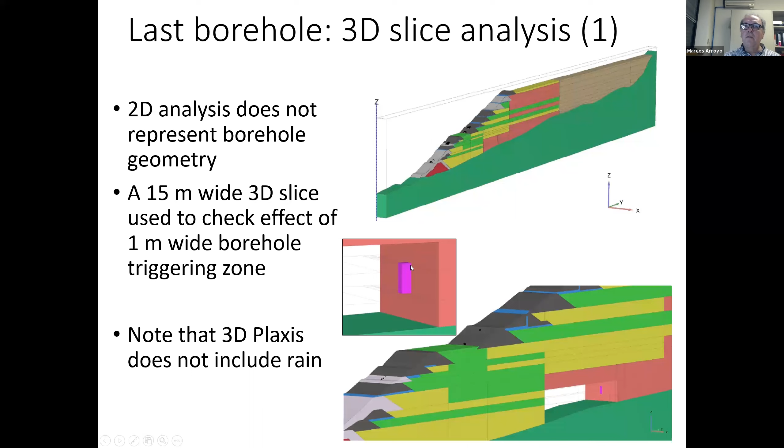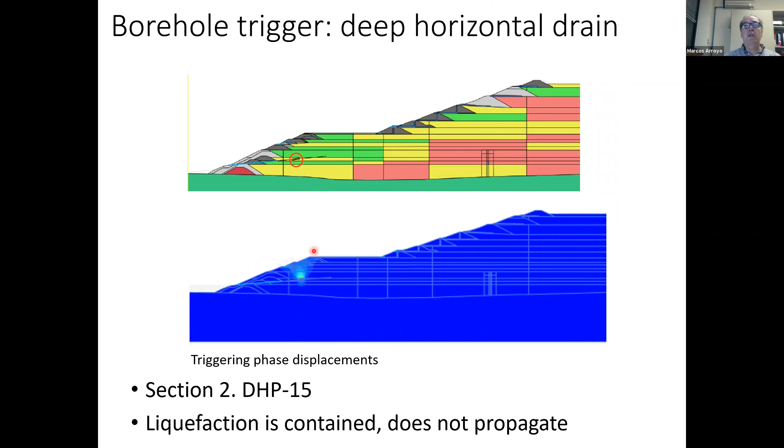We did also some analysis to see in another section, the penultimate borehole, what happens if we liquefy that. Well, what happens is that because the material distribution is different, liquefaction is contained. It doesn't turn into a full failure at the dam face. Same if we try to reproduce the event of that failed deep horizontal drain. It was closer to the front, the materials were better here, and well, there was a bit of liquefaction, but it was contained.

So I'm concluding with some lessons learned. And the more obvious perhaps is that you shouldn't drill with water in a liquefiable material. Others is that if you're going to analyze triggering, you should use critical state models. They give a lot of insight. And you should use coupled hydromechanical modeling.

Also, something I have taken from this study is that we need to be humble, because we have now a working hypothesis, but liquefaction is an unstable phenomena, and I really won't be surprised if we are corrected in due course. And from a larger point of view, if you consider that this kind of analysis will move into regulation and more people will use it into standards, there will have to be a lot of thinking about where to place the uncertainty in your models, if you're going to analyze hazard. I have some suggestions for that, but I have spoken for too long.

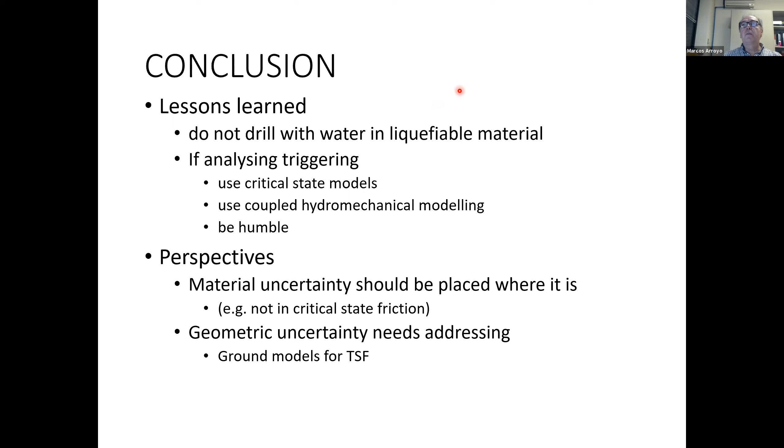So probably everybody has left already, and I'm finished. Thank you for being there. And I can come back to this later. Are you still there? I should stop sharing my screen, no? Yeah, great.